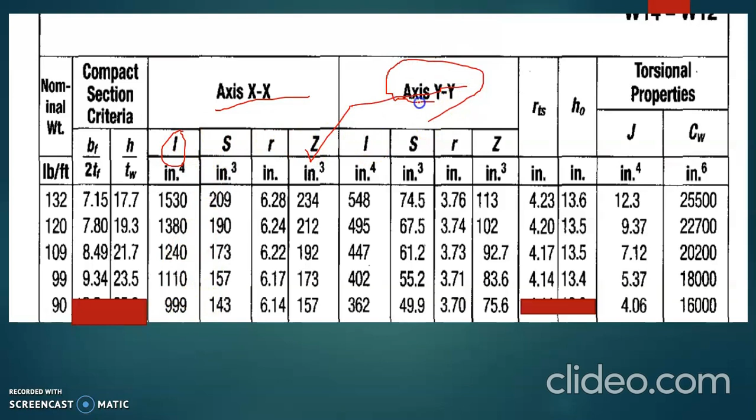There's also some properties about x-axis: I, S, R, and Z are given, and same for axis Y, that is I, S, R, and Z is given. RTS and H naught are not given here. J is also given, that is 4.06, that is torsional constant, and CW, the warping constant, is 16,000 inch to the 6th power. So we find A, we can calculate A, that is from section properties.

If we see this here, we are given that the flange width is 14.52, that is 14.5. The flange thickness is 0.710, the web thickness is 0.44, the overall depth is 14 inch.

So we can also easily find the area of the section, that is 0.71 into 14.52, this in 2, that is 2 into 0.71 into 14.52, plus the web area, that is 14 minus 2 into 0.71, multiplied by 0.44. And the IX, SX, and RX, IY, SY, and this is also given.

So we have to find firstly whether the section is compact or non-compact. As we know that lambda equals Bf by 2Tf. So this value, 14.52 by 2 into 0.71, is 10.225, and we know that the highest limit of plastic flange is 9.1516. This comes from 0.38 root over E by Fy. E is 29,000 KSI, Fy is 50 KSI given. So the section is not compact.

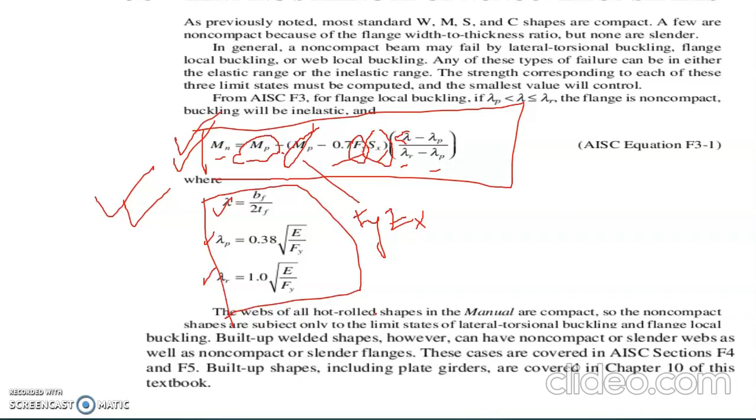Now we have to find, for calculating nominal moment capacity based on non-compact section, we have to find MP, that is MP equals Fy into Zx. As Zx is not given here, we have to find the value. So to find the value of Zx, which is in our view, our section is like that.

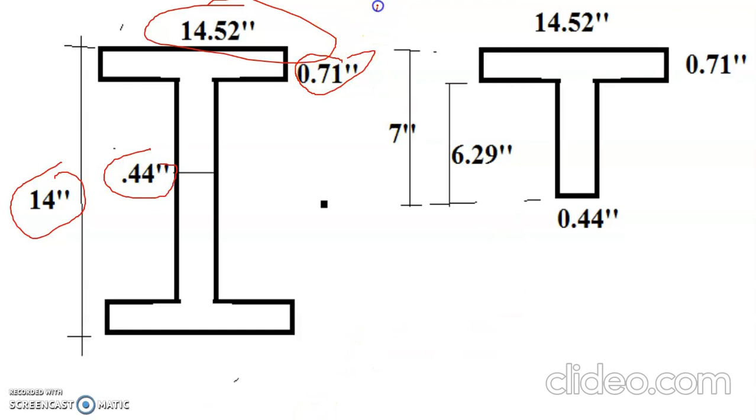14.52 by 14 inch, that is the width is 0.44 inch, and the flange thickness is 0.71 inch. If we cut the section into two parts, then the half part is shown in the right figure. And in this figure, we have to consider this as a compression part, and we need the CG of this compression part.

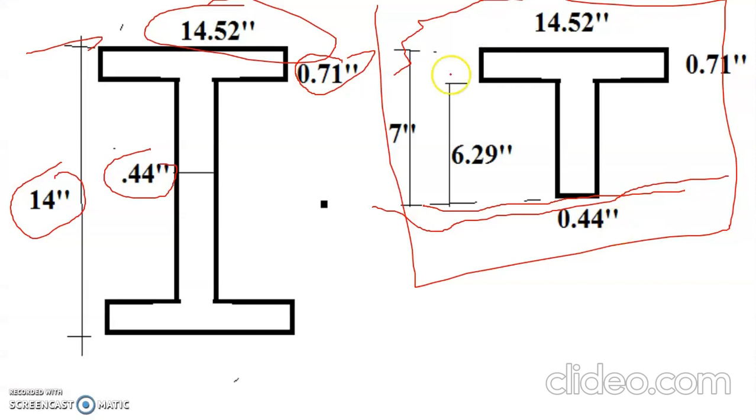We have to find the CG to get the value of A. So if we want to get this value with reference to this neutral axis, we have to find the CG of this portion with respect to the neutral axis. This value, A, is the distance between resultant of compression and tension part. So the value from neutral axis will be A by 2.

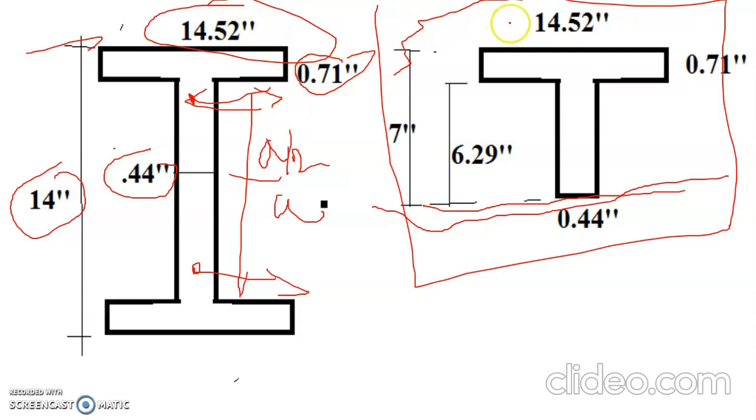So we can write A by 2 equals 14.52 into 0.71, that is the area, we can call it A1. So A1, then we have to find Y1.

As the total depth is 14 inches, so we are considering 7 inches. So Y1 will be 7 minus 0.71 by 2, that is the CG of this point. It is located at 0.71 by 2 inch from the top, below the top flange.

But we can write this as the web portion in the middle half is 6.29, so we can write 6.29 plus 0.71 by 2. Either way we can write it.

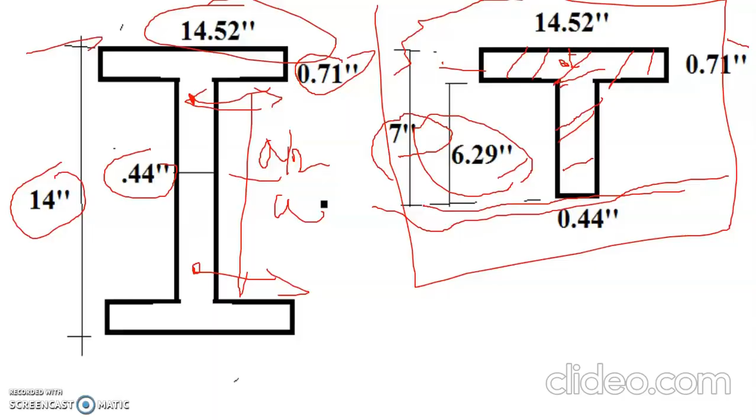Then we can find A by 2 is 5.904, so A equals 5.904 into 2. If we calculate the area, we can find these 2, flange and web, so the area of each part individually, and that is 26.1536, and Zx, that is ZX, you will see.

So now we get plastic section modulus ZX equal I by 2 multiplied by moment arm, and this is the area of tension or compression, and this results as 155. The unit is inch cube because the unit of area is inches square and the moment arm is inch, so it's inch cube.

So we can now calculate the plastic moment MP, that is Fy into Zx. We know Fy is given as 50 ksi and Zx is 155 or 157, that is 7850 kip inch.

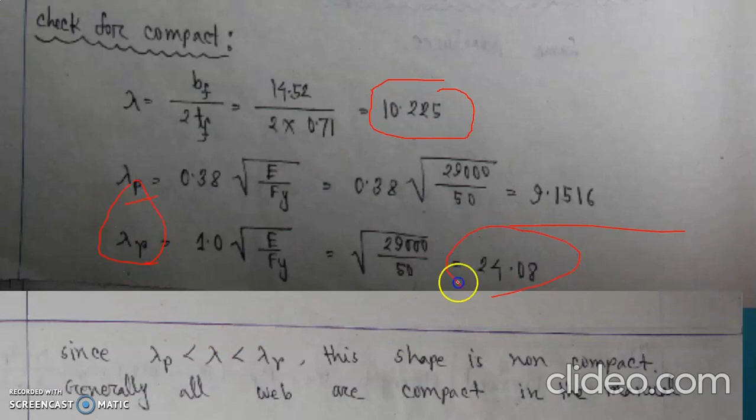Putting all these values, we get the nominal flexural strength as 7646 kip inch, which is less than MP. So this is the nominal moment capacity of the beam based on flange local buckling.

But we also have to check the lateral torsional buckling, and we have an unsupported length of 45 feet as stated in the question. This is because the beam is supported over 45 feet, with lateral supports only at the support sections.

So LB is given as 45 feet. Now we have to calculate LP. LP will be, as per the equation, 1.76 times ry times root over E by Fy.

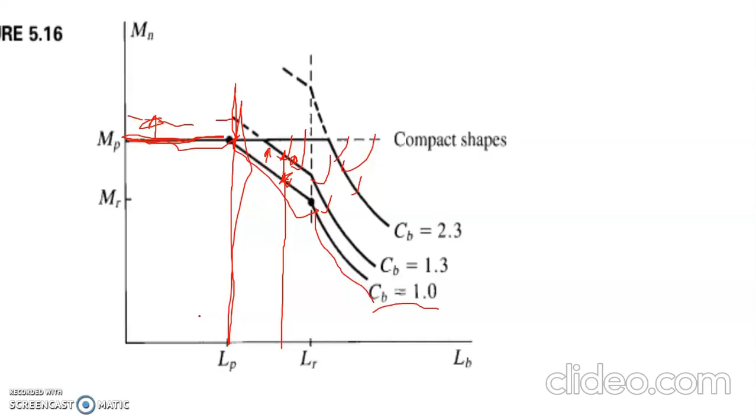All this data will be from the section properties. rY, radius of gyration about the Y axis, is also given as 3.7. If we go to the section properties, we can find this is also given. And E is 29,000 ksi for steel, and Fy.

Based on this, LP is 13.07, so it is not in the range of no instability, as our LB is 45 feet, far greater than this. Now we are to calculate LR.

To calculate LR, we need the value of RTS, H naught, and other values. So now we will calculate LR. We need RTS. This value is known: 29,000 ksi, 50 ksi, J is given, and C for a doubly symmetric I section is 1. J is given as

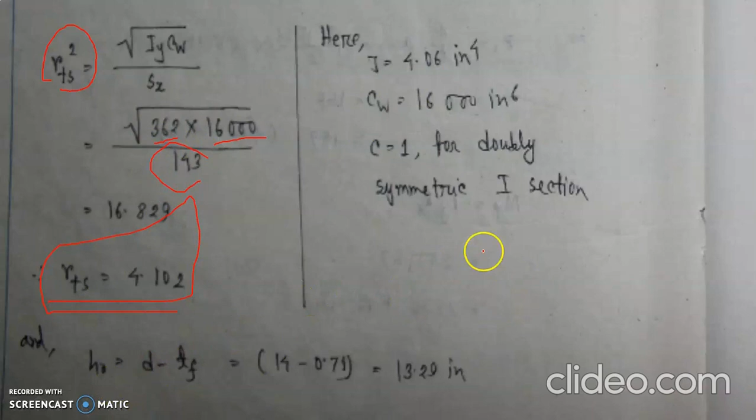So H naught, the distance between the flanges, the midpoint between the flange planes: we know the total height is 14 inches, and the midpoint of the plane will be 0.71 by 2 inches from the top, and the midpoint from the bottom end will be 0.71 by 2 from the bottom. So ultimately the distance between the planes will be 14 minus 0.71 by 2 minus 0.71 by 2, that is 14 minus 0.71, that is 13.29 inches.

So from there we can put the values of RTS and H naught. 1.95 RTS we have already calculated as 4.102, E equal to 29,000 KSI, 0.7 Fy equal to 50 KSI, J equal to 4.06 from the section property, C equal to 1, Sx, and H naught equal to 13.29 we have calculated here, and other values will be the same.

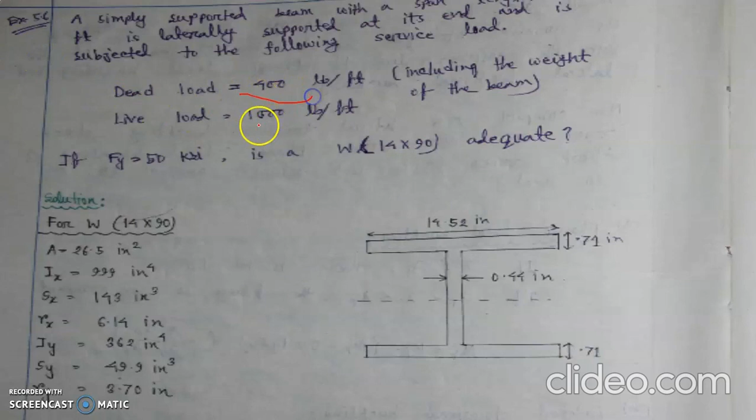From the loading condition, as it is subjected to uniform load, both dead load and live load, so for uniform load we have already calculated CB equal to 1.14, and based on these values we calculate FCR equal to CB equal to 1.14, then pi square E.

LB we have calculated as 45, given the 45 feet span, and then we are converting it into inches, as all the units are in kip-inch. So based on this value, FCR results as 37.2 KSI.

Now we have to calculate the nominal strength, that is MN equal to FCR times Sx, and from this value we find FCR equal to 37.2 KSI and Sx is 143. Then the nominal moment is 5,320 kip-inch, which is less than MP equal to 7,850, and if we convert this into kip-feet by dividing by 12, it is 443.33 kip-feet.

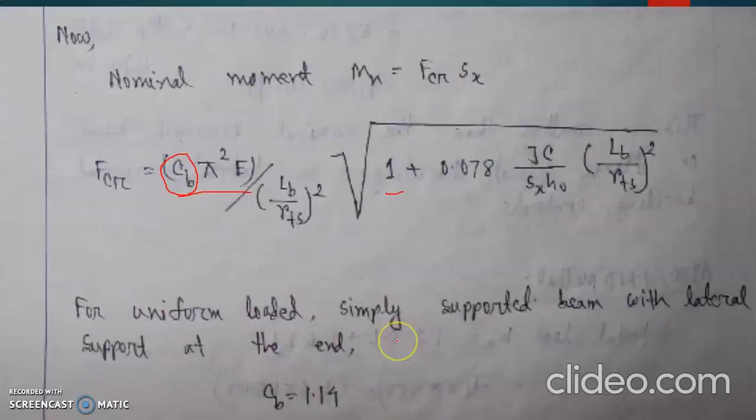So we obtain two values. One is based on lateral torsion buckling, 443.33 kip-feet, and based on flange local buckling the value is 637.5 kip-feet. So we have to take the minimum of these two nominal moment strengths.

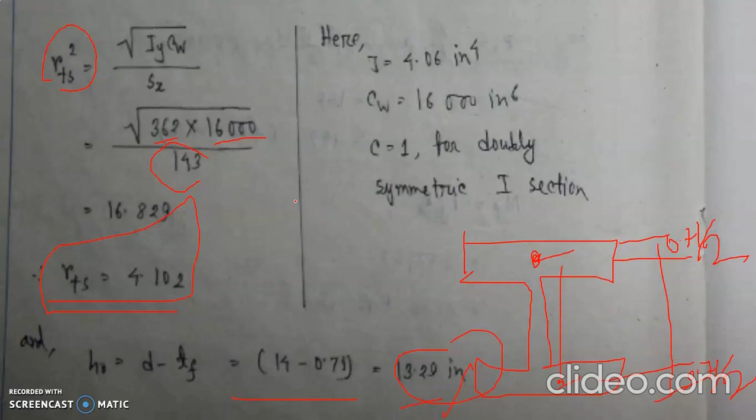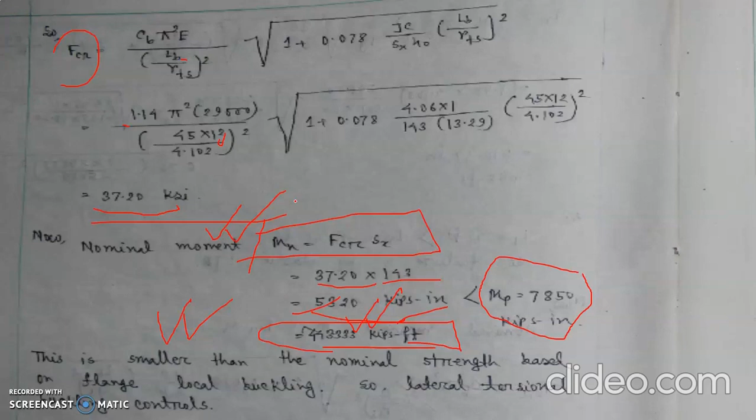So between 637.5 and 443.33, the lowest is 443.33. So the nominal moment capacity of the beam is 443.33 kip-feet.

So we have to calculate based on the LRFD method and also the ASD method. In the LRFD method, we have to multiply the dead load by 1.2 and the live load by 1.6. So we multiply dead load by 1.2, that is 400 into 1.2, and 1.6 into live load, that is 1000. Then the load becomes 2080 pound per feet, that is 2.08 kip per feet.

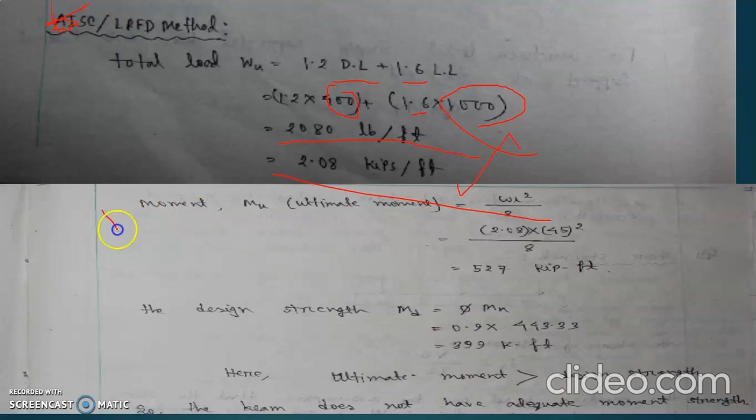We have to convert it into moment. The ultimate moment M, because it is a simply supported beam with W load per unit length, the maximum moment will be W L square by 8. So it's 527 kip-feet.

And we have the nominal capacity as 443.33, and the design strength will be 90% of this, that is 399 kip-feet, and we need for the ultimate moment 527 kip-feet. So the section is not adequate.

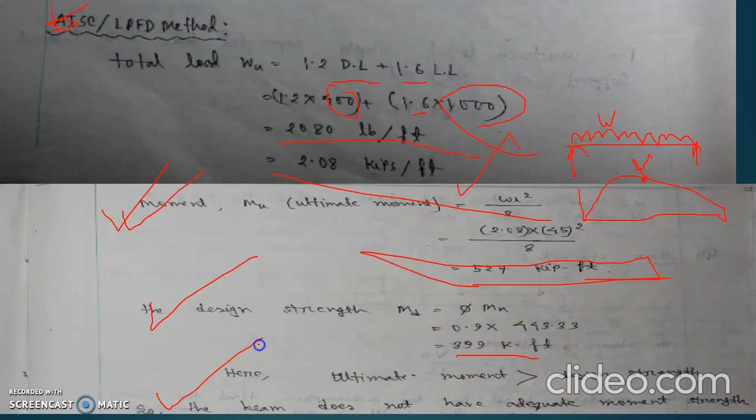This was the LRFD method. In the ASD method, we don't need to multiply the loads, but we will limit the allowable moment by dividing Mn by 1.67, that is the nominal capacity becomes 266 kip per feet. So the allowable moment capacity is 266 kip per feet, and for the actual loading condition, the total load moment is 1.4 kip per feet.

So the actual moment is 355 kip-feet, but we have the allowable moment as 266 kip per feet. So the beam section is not adequate.